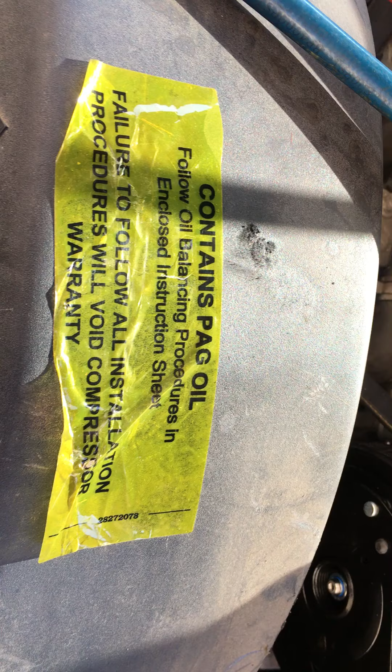Follow the oil instructions that you get with your new compressor. The technician who put this on walked away with the sheet, unfortunately. It's in his vehicle. He's coming back right now, and we're going to follow the oil fill procedures.

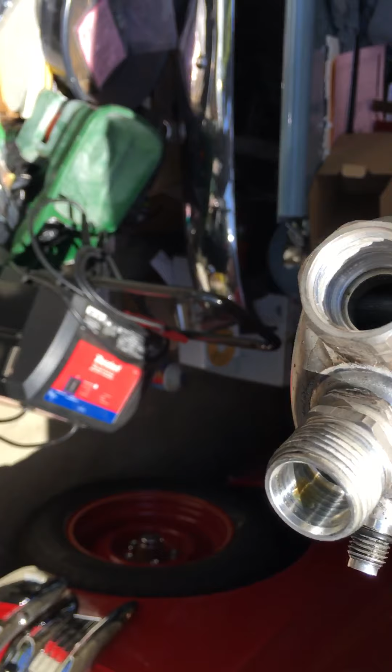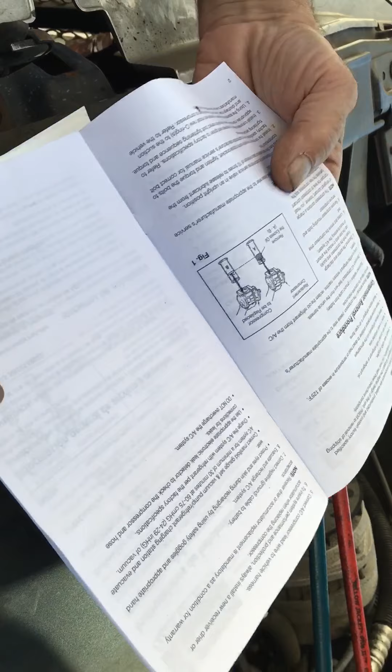Replacement compressor, remove the excess oil. A compressor to be replaced. B, see, it tells you to. So where's the old compressor? In the back of my car. Okay, cool. I brought it with me, I didn't throw it away yet.

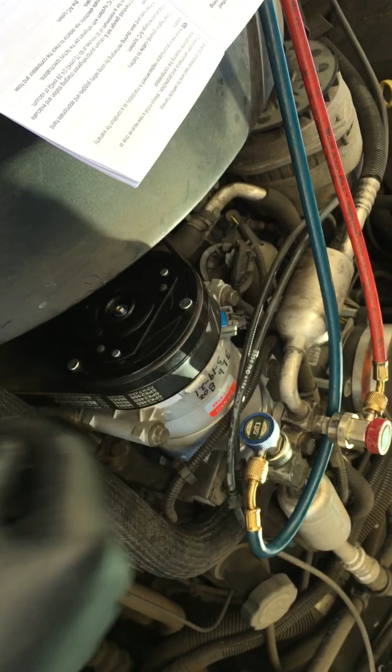But how much oil is in here? Nothing, okay, that's good, nothing is in there. I don't know, that's why I was supposed to read this last night, and I didn't. Because otherwise, we don't know if we have to take this off or not and measure. Because if this is full of oil, we don't know. If this is empty, we don't know.

I know, well, I'm supposed to know this. You're the pro, you're supposed to know this. Every vehicle is different, alright, okay.

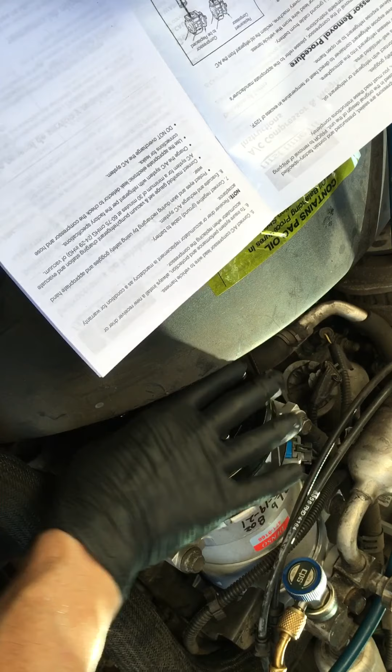Well, that's why we always use the same procedure. Okay, always follow the compressor removal procedure. Disconnect the compressor lead from the vehicle harness. Using a certified recovery machine, reclaim the old refrigerant. Disconnect the suction and discharge hose, and quickly cap the hose ends to reduce the amount of moisture entering the AC system.

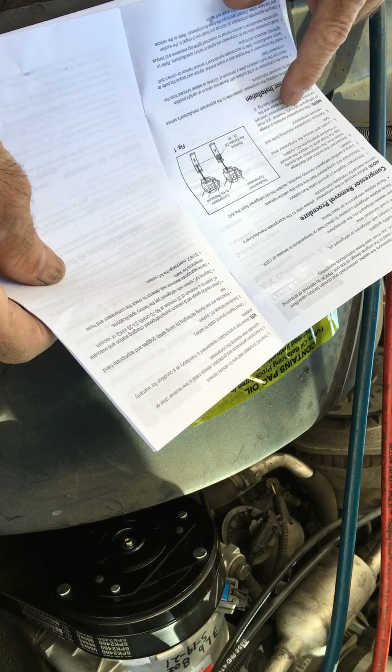Then remove the compressor drive belt. The compressor contains a charge of lube. However, you must compare the level of compressor lubricant between the new compressor and the compressor being replaced.

Okay, place the compressor on a flat surface with the service valve in an upright position, and turn the clutch press plate a minimum of 10 times to release lubricant from the compressor head. Install the compressor to the engine or engine bracket, tighten and torque the bolts.

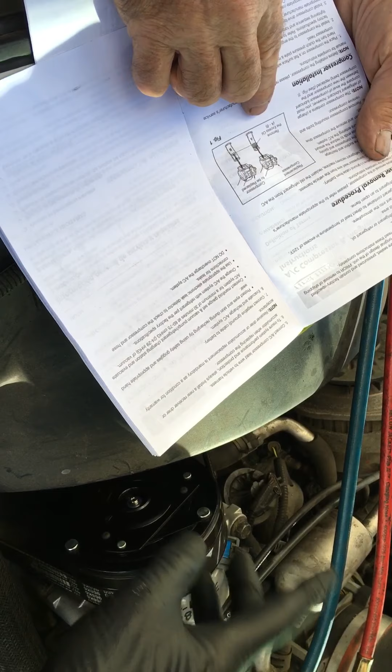It doesn't say anything about... so basically what they're saying is the new compressor, you have to pour the oil out of and measure. The old compressor, you have to pour the oil out and measure, because sometimes they source these from different manufacturers.

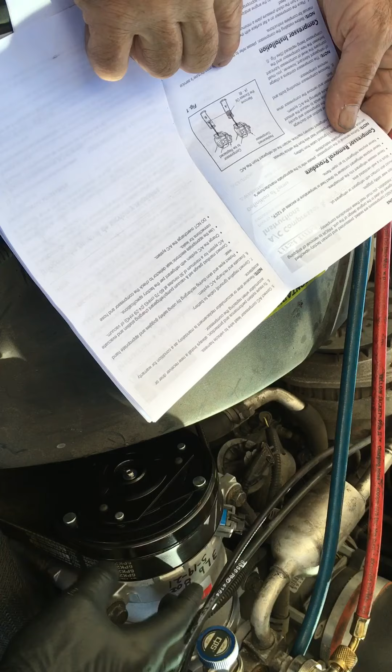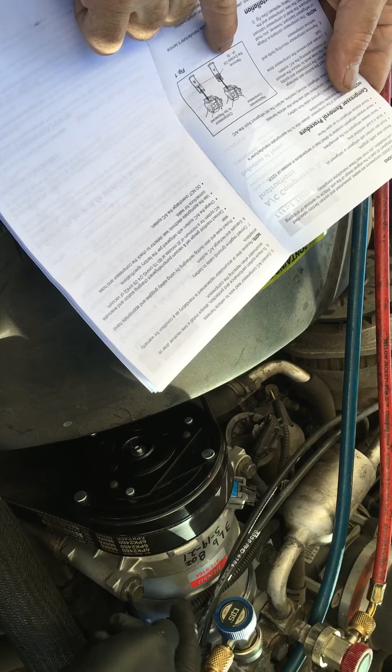Even though it's one manufacturer, they might source it or change mid-production line. Say they put 7 or 10 ounces of oil in this compressor, which was good enough for a whole system. Another manufacturer's production line might only put enough oil that belonged in the compressor, say 2 ounces for example. And then another compressor manufacturer might just ship them dry with nothing in it. Right, and so then you would never know how much oil to add.

And that's why, what is that? RTFM.

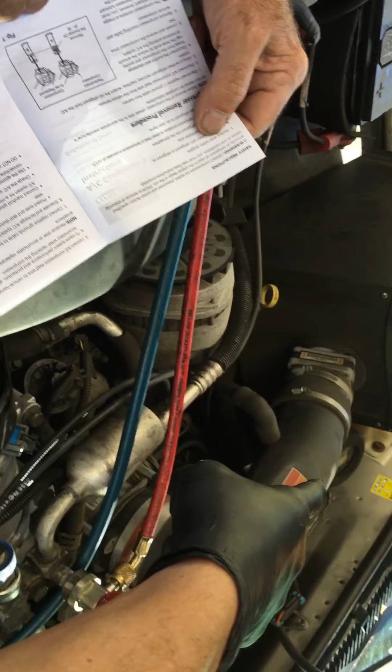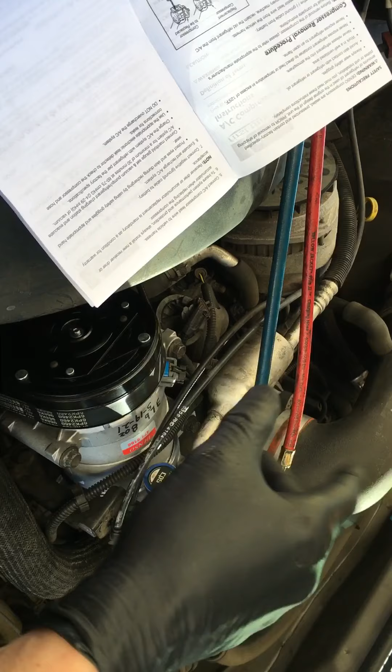And we got the oil that needs to be replaced, because we got a brand new accumulator over there, and that's roughly, I know off the top of my head, roughly 3 ounces of oil right there. But this one actually was dry, because the system ran dry, so I know that wasn't filled with oil. So why does it show?

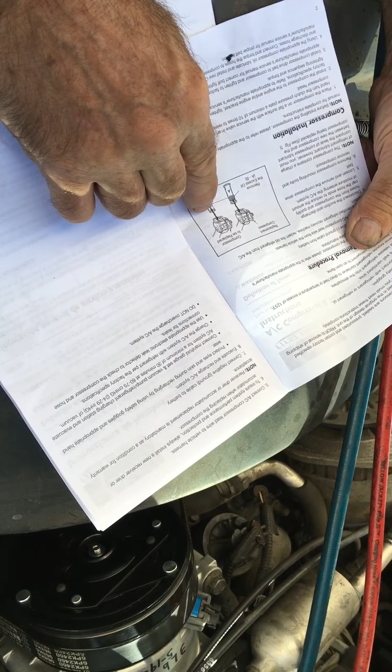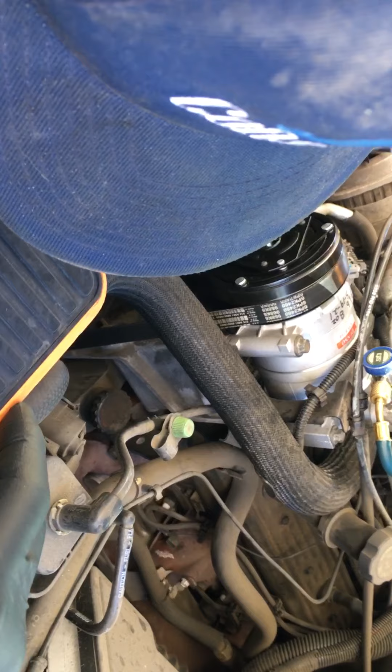So where's the plug that fills it up? On the side? Not all of them have plugs. This one, they're actually showing on the side, pouring it upside down through the holes, draining from the back here.

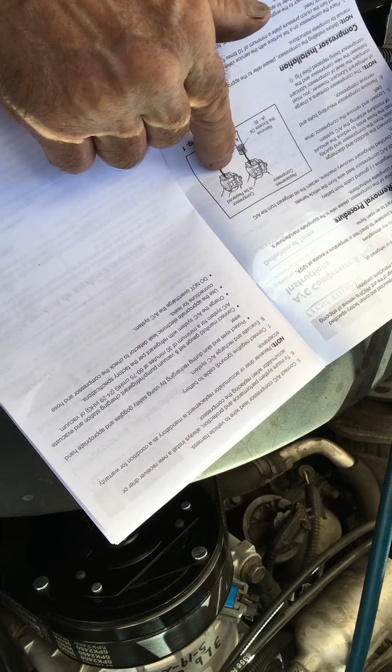And they only use a compressor as a reference, they don't always use the actual picture of the compressor. Well, that's really stupid.